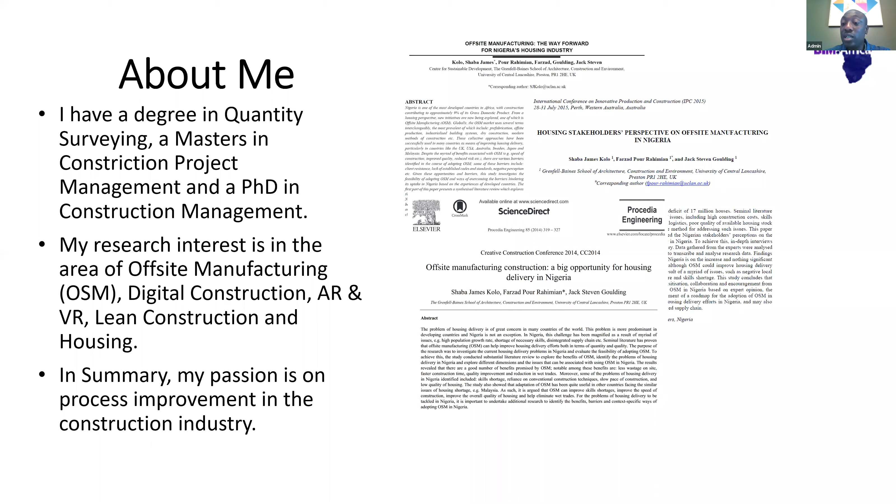So mainly, my research is focused on trying to adopt some of these innovative technologies, and BIM is one of them, as a way of improving housing delivery in Nigeria, in Sub-Saharan Africa, and in Africa at large.

A brief outline of what I'll be doing today: I'll have a brief introduction to the topic, and try to contextualize my presentation to focus more on Sub-Saharan Africa, and let you know why I'm contextualizing it to Sub-Saharan Africa. I'll discuss some of the problems of housing in Sub-Saharan Africa, a brief overview of offsite manufacturing and BIM, and then try to show a link between offsite manufacturing, BIM, and housing, especially in Sub-Saharan Africa.

And then I've tried to come up with a roadmap of how BIM and offsite manufacturing can be adopted in order to enhance and improve housing delivery in Sub-Saharan Africa, and of course a conclusion to my presentation.

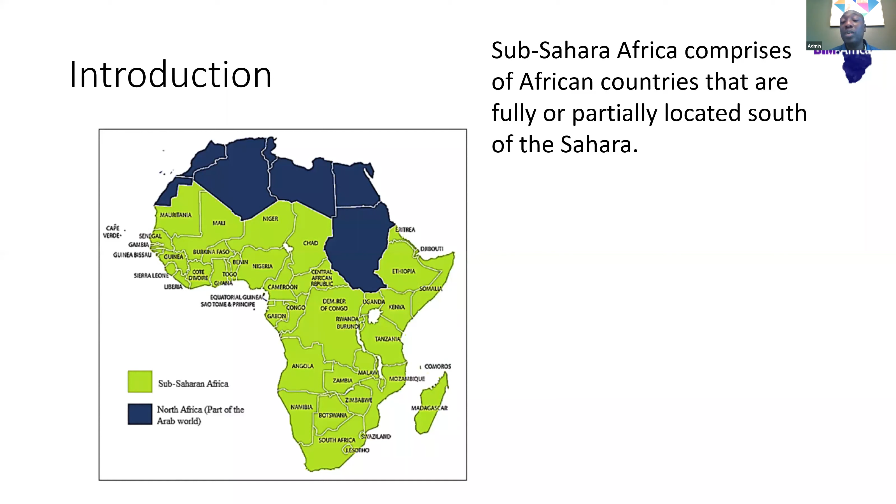So most of Africa really falls under Sub-Saharan Africa. However, the parts in blue are mainly North African countries, like Egypt, which are mainly in the North African part of Africa, and are considered part of the Arab world. As a result, I've tried to contextualize my presentation on housing in Africa to focus more on Sub-Saharan Africa, with exemption to North African countries, which are considered part of the Arab world.

That's the area where housing falls. So in order for a person to attain self-actualization, where they can achieve their full potential as human beings, become the best they can be, and achieve what they desire in life, it's important for all of these needs to be met. So it's important to first start with the physiological needs, then attain the safety needs, then belonging and love, esteem needs, and then self-actualization.

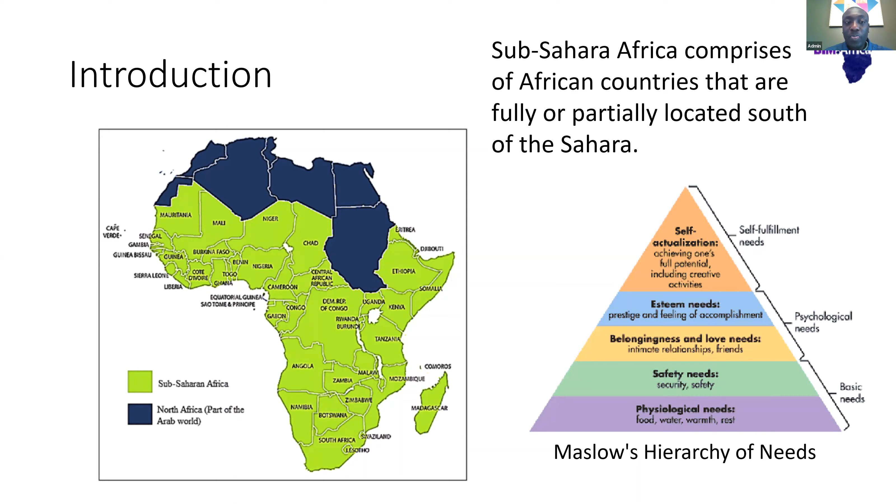Basically, brief statistics that I was able to put together: it is expected that by 2050, the urban population in sub-Saharan Africa will increase to about 1.2 billion. This is not the population of sub-Saharan Africa, but just the urban population. Urbanization is one of the major issues of housing. A lot of people are moving from rural areas into urban areas, and as a result, there is a serious demand for housing in urban areas.

So if you look at sub-Saharan Africa, look at most of the big cities. If we look at it from the angle of Nigeria, you look at big cities like Lagos, you think about cities like Abuja, where there are a lot of business opportunities and high potential for people to attain self-actualization, which is the top of the Maslow hierarchy of need. In such areas, the population is normally very high.

If you look at it from the context of South Africa, for instance, places like Johannesburg have a high population compared to some of the other areas. Places like Durban also have high population, but in Joburg it's normally quite high.

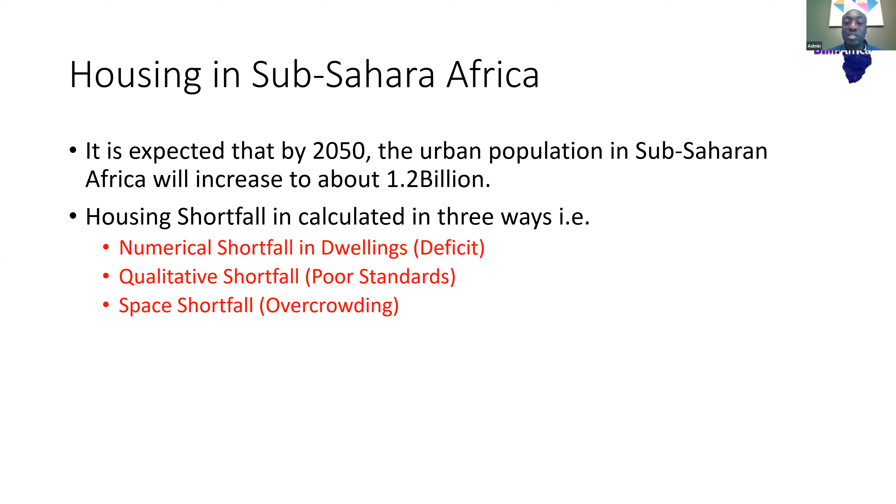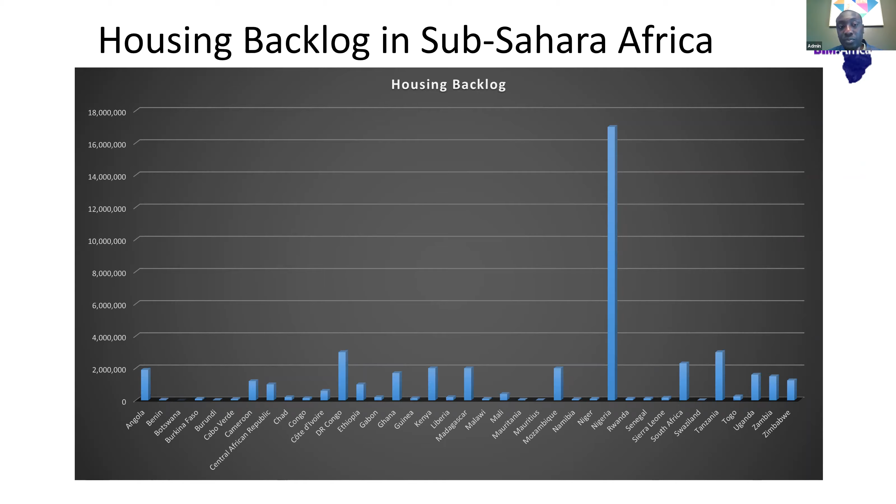So what are some of the problems of housing in Nigeria, in sub-Saharan Africa, for instance? One of the major issues we have is the high population growth rate. Like I said earlier, by 2050, it's expected that the urban population of sub-Saharan Africa will skyrocket to about 1.2 billion.

With 1.2 billion people in the urban cities, there is going to be a lot of demand on the infrastructure in those cities - a lot of demand on healthcare facilities, and of course a lot of demand on the available housing stock. So high population growth and urbanization is one of the major problems faced by several countries of the world, especially countries in sub-Saharan Africa, where the birth rate tends to be a bit on the high side also.

We also have the issue of skills shortage. This doesn't mean we lack laborers in sub-Saharan Africa, but rather that we lack a high level of skills required for a lot of these jobs, or for these houses to be produced. In most African countries, a lot of the tradesmen are not educated, and because they're not formally trained, they need a lot of supervision in order to deliver on tasks like tiling, painting, or laying blocks, to achieve a high level of work. So skills shortage is one of the issues sub-Saharan Africa faces when it comes to housing.

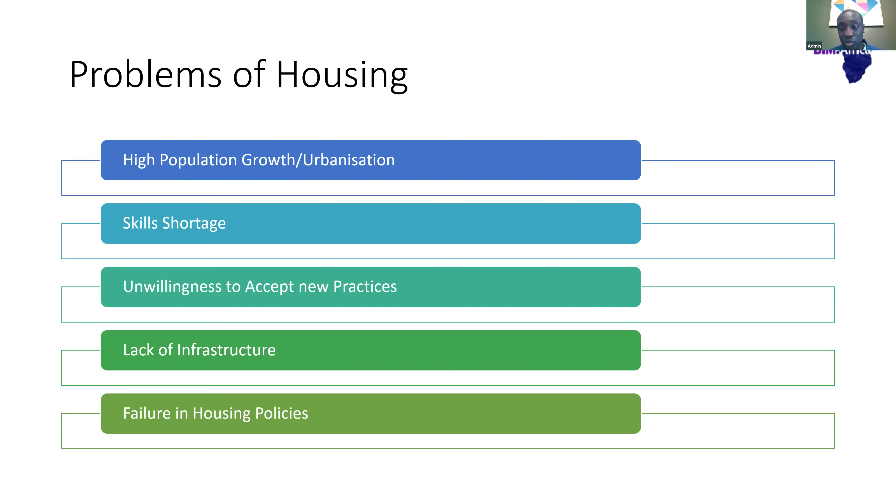Of course, we also have failure of housing policies. There are several housing policies that have been put in place in several countries in sub-Saharan Africa. However, these policies tend to have failed in being able to deliver on the promises.

We've got poor infrastructure, cumbersome regulatory requirements. The regulatory requirements in sub-Saharan Africa can be a bit tricky. Averagely, it takes about 160 days across sub-Saharan Africa for you to get proper approval to start a construction process. In some parts of the world it's a lot faster, especially with key areas like housing. Some incentives, like speeding up approval for housing, might be what housing developers need to get the needed encouragement.

Also, we have poor maintenance culture. Once it's built, it's built, but maintaining it is always a big deal, always an issue. And if we don't maintain properly, then we have the issue again, not of quantitative housing shortage, but of qualitative housing shortage.

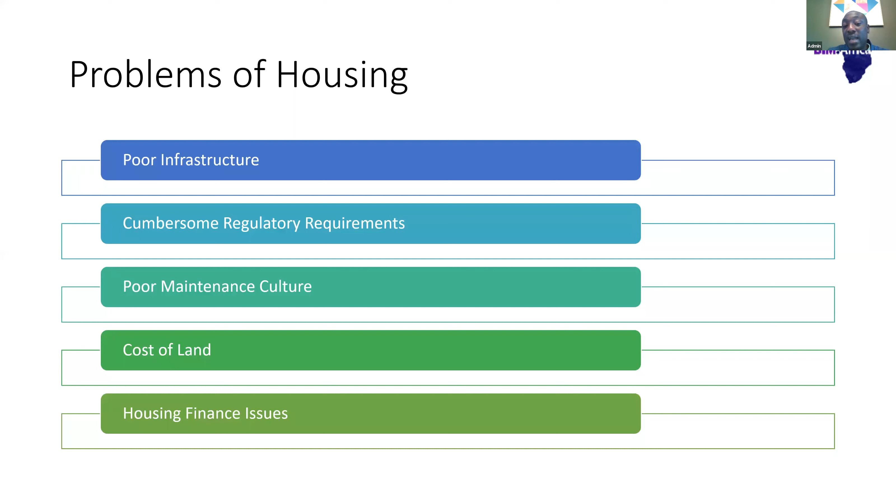We also have cost of land, which is high. Another major one, of course, is housing finance. In a lot of developed countries, people don't just come out and buy a property cash. There are so many mortgage systems in place that help you to buy properties.

With such encouragement, the housing issue can begin to gradually minimize. However, I know in sub-Saharan Africa there are lots of countries with mortgages in place for citizens to be able to acquire properties.

However, the issue there is that oftentimes the interest rates on some of those mortgages might be too high for people. And the term in which they have to pay it, for instance in the UK, you can get a mortgage that lasts as much as 35 to 40 years. Some people can take it shorter, but in most sub-Saharan African countries they do not have that opportunity to take a mortgage for such a long period of time, and that's also affecting the level of housing delivery throughout sub-Saharan Africa.

So looking at the problems of housing, based on my research and research from other scholars, offsite manufacturing and BIM can help to really minimize these issues.

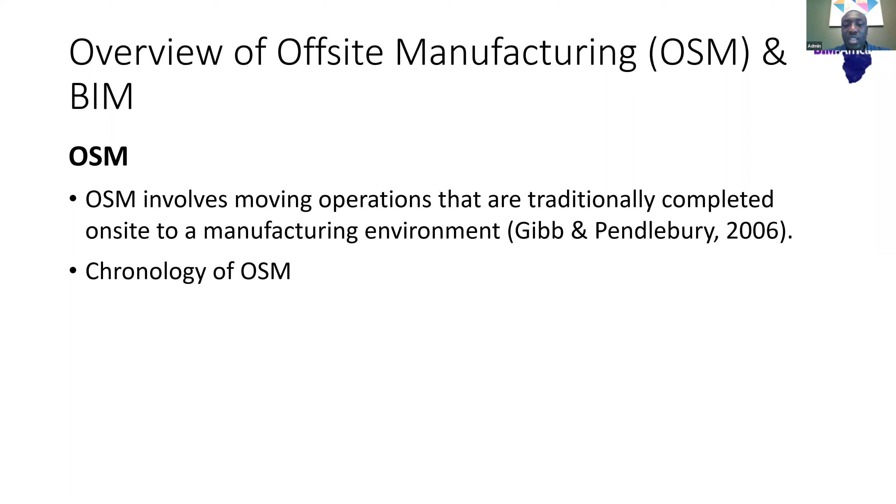So, a brief chronology of offsite manufacturing. Mainly, it started as a result of housing demand. That's why there was a need for offsite manufacturing or prefabricated housing. For instance, after World War I, there was a lot of damage done to housing, and they needed to house people very fast, so they had to adopt prefabricated construction.

Again, after World War II, the same thing. There was so much damage done to housing, and we needed to give accommodation as fast as possible to our citizens. So those were the main reasons why prefabricated construction came into existence.

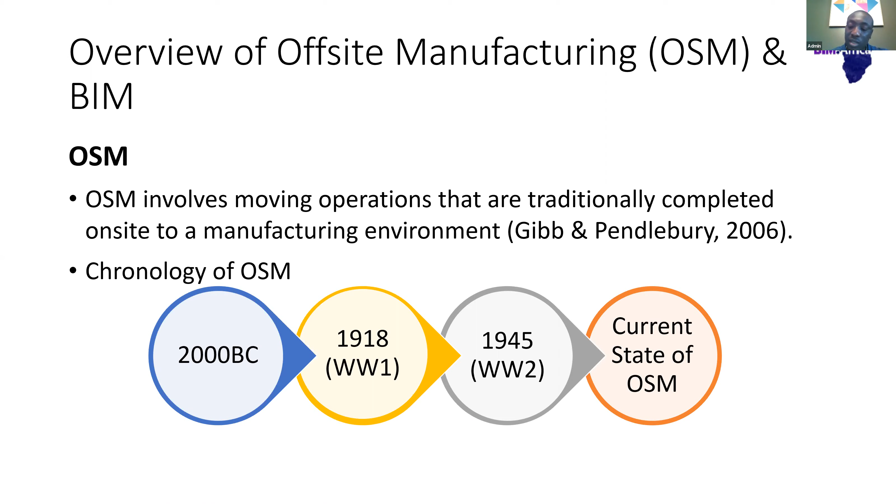However, between World War I and World War II, the main issue was that the houses produced in those times were not able to stand the test of time. As a result, people became averse towards prefabricated housing, with the opinion that they do not last long and cannot stand the test of time. That has really affected even the offsite manufacturing and prefabrication we have today.

There are several types of offsite manufacturing, but basically there are four types. Sub-assemblies and components, that's simple, the manufacturing of building components basically in a factory, which a lot of countries, especially developed countries and sub-Saharan Africa, are already into. Talk about things like manufacturing doors. A lot of companies, a lot of countries already do that. However, when you go into things like panelized construction, then it begins to fizzle.

So basically, the flexibility tends to decrease as you go up. From sub-assemblies and components, they're quite flexible because they're very tiny components.

By the time you get to the level of pod, flexibility in terms of innovative design and making changes becomes more tricky. However, we've got panelized and volumetric systems. Panelized systems are about producing 2D parts of a building in a factory and bringing it to site to assemble. 2D parts are simply, for instance, the walls of our buildings. If walls can be produced in a factory, then producing houses faster becomes achievable.

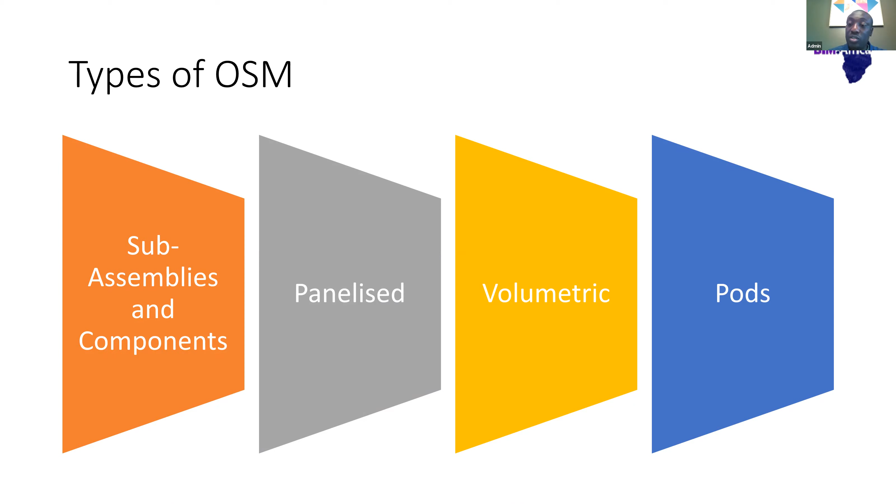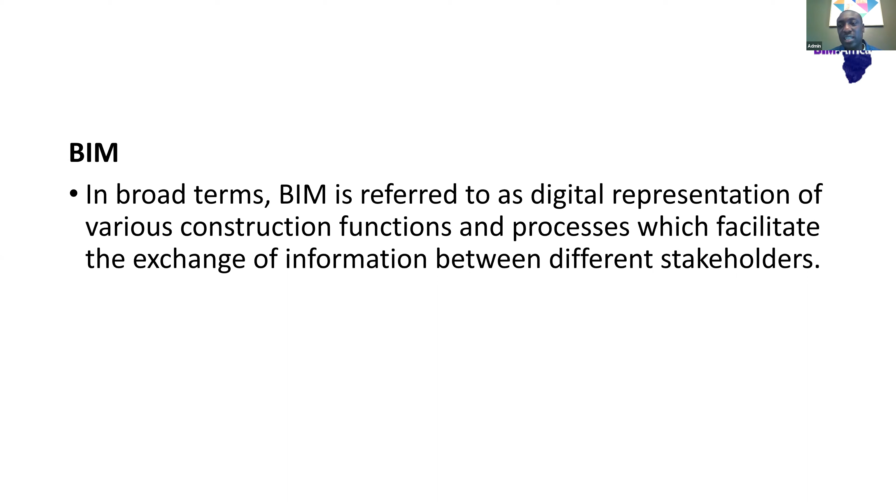I wouldn't touch much on BIM, because most of the talks have been on BIM and we've had so much information regarding it. However, just a quick definition: BIM is basically a digital representation of various construction functions and processes, which help in the exchange of information between the various stakeholders involved on a project. That's a brief definition of what BIM is all about.

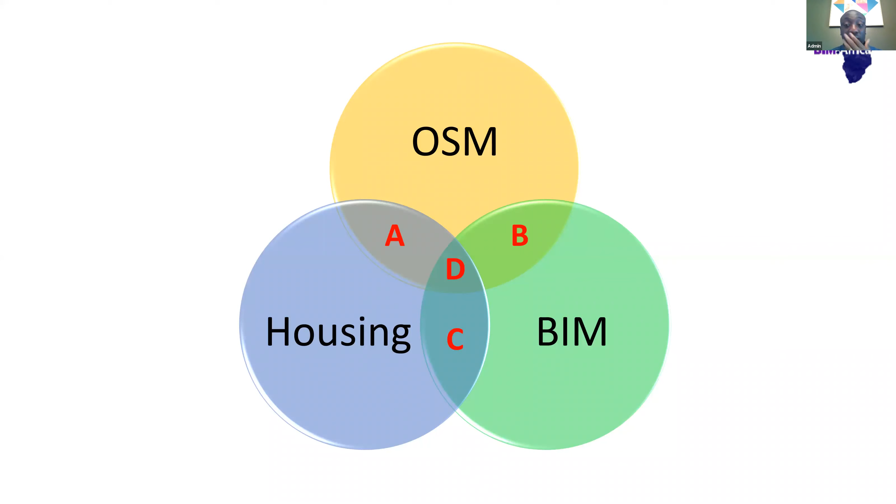However, where you've got offsite manufacturing, housing, and BIM together, at point D in the middle, some of the shortfalls of offsite manufacturing will be augmented by BIM, and at that point housing will be able to benefit from the benefits of offsite manufacturing and the benefits of BIM all in one.

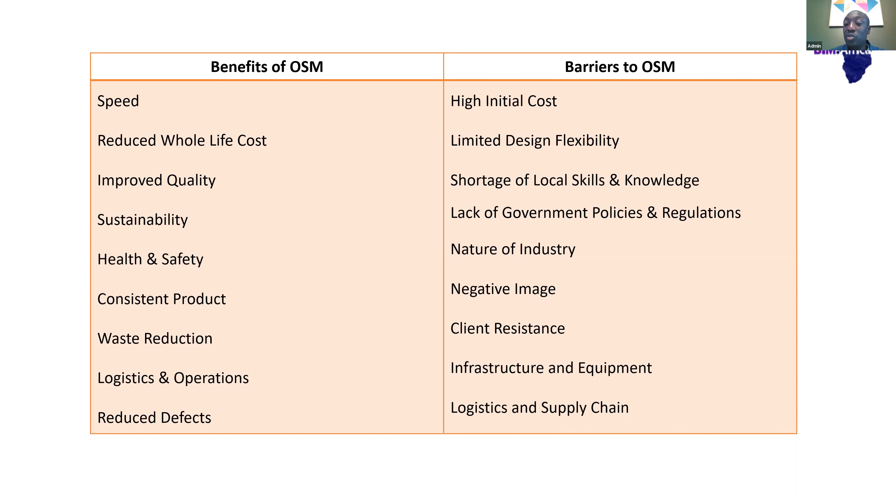Client resistance - the client tends not to want offsite manufactured houses, because of the negative image. Infrastructure - we don't have the infrastructure needed in sub-Saharan Africa, and we also don't have the needed logistics and supply chains to be able to get all the materials we need for offsite.

What are some of the benefits of BIM to offsite manufacturing now? Because we know that offsite manufacturing does have its shortfalls, but where BIM is of major advantage is the fact that where offsite manufacturing fails, BIM is able to significantly augment it. That is why a relationship between BIM and offsite manufacturing will go a long way in improving housing delivery in sub-Saharan Africa.

However, if it was just offsite manufacturing, company A might not know what company B is producing, and as a result, they might be producing different standards in terms of components. However, if we've got a BIM model, then all the stakeholders involved in the project, so the electrical engineers, are able to understand what the designers have designed.

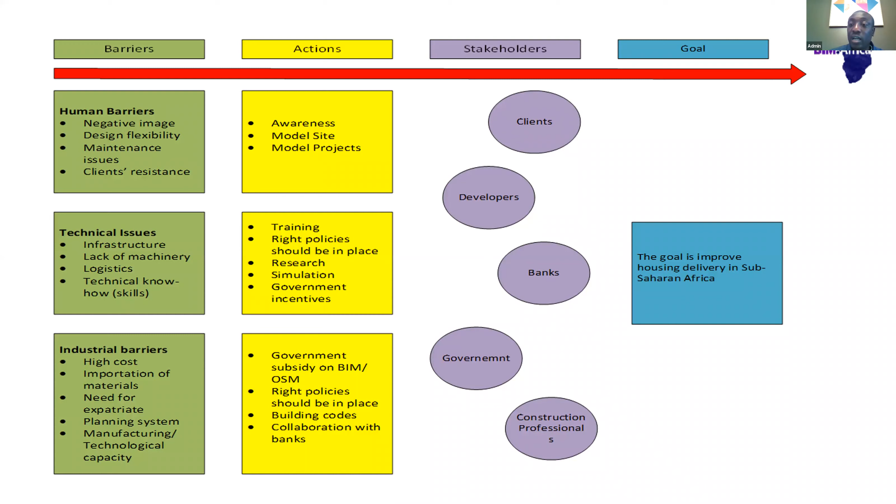So what I've got here is just a model of how to improve housing delivery in sub-Saharan Africa. What are some of the barriers? What are the actions that are needed? And what the various stakeholders involved can do in order for those actions to be carried out, for our goal of improving housing delivery in sub-Saharan Africa to be achieved.

So I know I've rushed through the end, but I hope if there are any questions, you'll be able to ask me once I conclude the presentation. So in conclusion, housing, or having a shelter over one's head, is a very important necessity for everyone. It's important that in sub-Saharan Africa we are able to provide the needed housing in terms of quantity and quality, to the right people.

Housing shortage can be in different forms. It can be in the form of quantity, qualitative, or in terms of space, which is overcrowding. There are numerous problems, several issues with housing aside all of this.

However, there is a lot of hope for housing in sub-Saharan Africa, especially with the use of building information modeling and offsite manufacturing. Again, offsite manufacturing does have its barriers. However, BIM can help in minimizing or completely eliminating most of the barriers to offsite manufacturing that is faced.

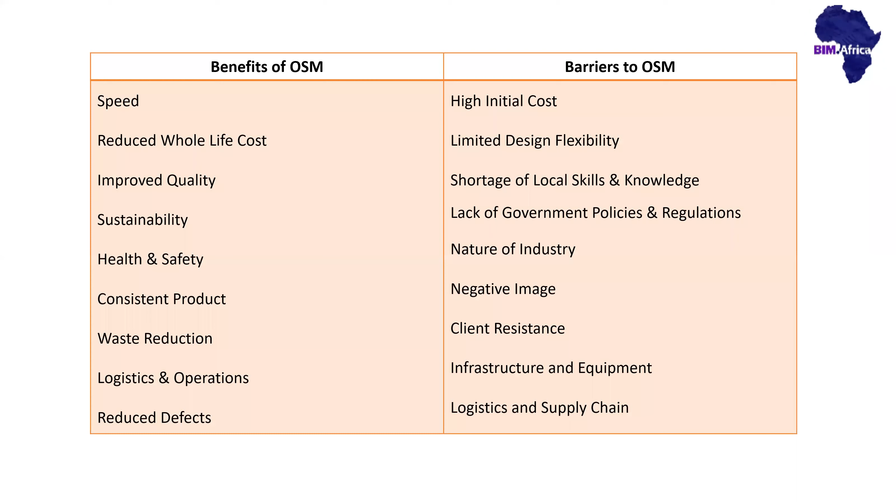Are you there? Then when you talked about improved sustainability of materials... sustainability of? Yes, hello, I can hear you. Of material. Okay, improved sustainability of materials.

Basically, what I meant by improved sustainability of materials — I said that in case of deconstruction. Based on the CIOB code of practice, we don't demolish buildings, we deconstruct them. Deconstruction is basically trying to rip the building apart slightly or fully, while ensuring parts of the building that can be reused are kept. That's basically what deconstruction is all about.

How does BIM help us do that? With a BIM model, you can tell what material was used in constructing a wall because it's there in the information. You can also tell what kind of wall this is, what kind of floor this is, and all of that.

Because the BIM model gives you the opportunity to tell all of those things, when a building is being deconstructed, it's easy to rip the building apart and gather the materials that can be reused. Take concrete, for instance — it can be reused. The materials that can't be reused, then it's easy to know what needs to go to landfill.